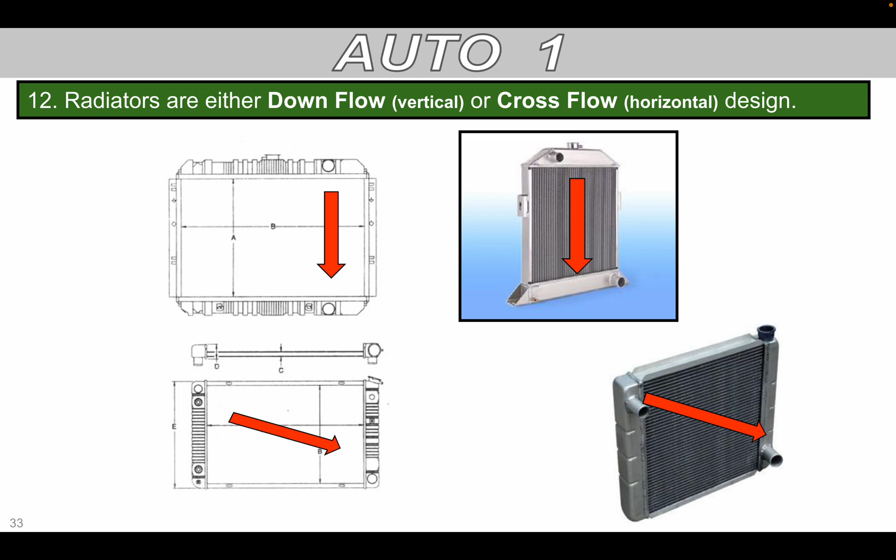Now, with that being said, radiators can be made out of different materials. More common than not, the fins on the radiator are going to be a metal, typically aluminum. Okay, because aluminum is lightweight, it can conduct heat fairly well. Okay, so that way the coolant can take that heat and discharge it into the air through convection, and then cool it down, get it back into the engine.

However, we are starting to see not just completely aluminum radiators. We are seeing parts of plastic added on to the aluminum fins. Plastic is also lightweight. It's very durable. It's resistant to the potential corrosive properties of the coolant. But the radiator cores themselves will still be metal.

Right, Chase? I wrote it down. What? Emerson, you can sit right there. But what about Roto? Yep, that's going to be his new spot. How's that fair? You're correct, it's not fair. He just rubbed it in my face. No, did he? Just one day. Just give me one. No chance. Chase can't handle it. Yes, I can. No, you can't. He wasn't even talking. I have my stuff written down. Yeah. And I'm looking for my notebook. Emerson, please sit in your assigned seat. I'd appreciate it. Thank you.

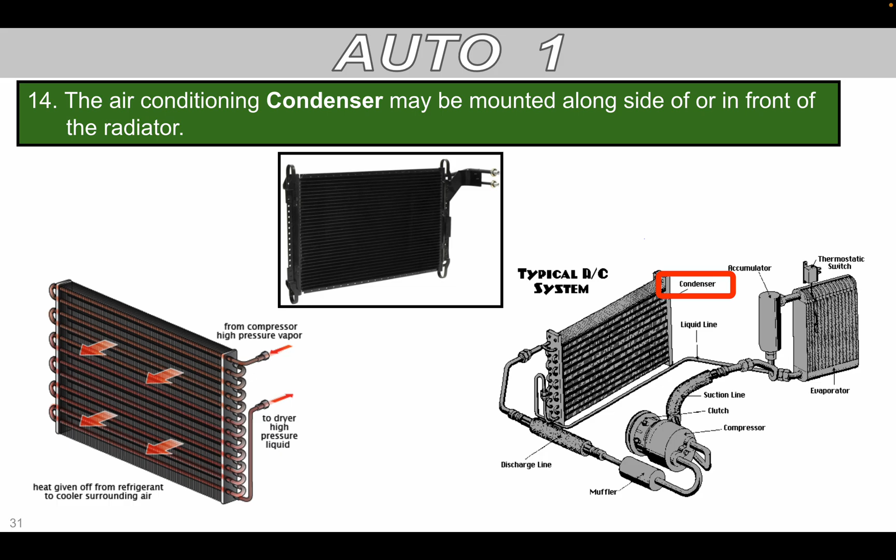But just note, the heater core in our coolant system is there to heat up the inside of our cab, right? Our air conditioning system with the condenser is designed to do the opposite of that, to cool the inside of our cab. All right, it's a very kind of interesting scientific way of how we do things. So, just so you are aware, if you see a mini radiator in front of the actual radiator, that's the AC condenser. Don't get them confused.

All right, next component that we're going to talk about, we got our radiator cap. The radiator cap is a very critical component in the coolant system. It's very technical, even though it might not look like it because it's just a cap, right? You buy a gallon of milk, it's got the little cap you twist on to hold it from spilling, okay? The radiator cap is more than just holding in the coolant, although it does do that.

So typically on the radiator, you're going to have a filler neck more often than not. So if you are ever low on coolant, you can add more coolant directly into the radiator, or more likely the reservoir tank, which we'll talk about here in a little bit. But some older vehicles, you add it right to the radiator. Then you put the cap back on. That cap seals the coolant system. This way we can actually pressurize the coolant system. We'll talk about why we do that here in a little bit.

It also is going to help relieve excess pressure that's being built up in the coolant system. You know how we talked yesterday about the hoses, and the hoses have an internal spring? The reason why we have those springs in that hose is so that way as the coolant system expands, it can stay rigid, or as the coolant system might be cooling off, we don't want the hoses to collapse on itself. So as we pressurize the system, that could expand things. So just kind of keep that in mind.

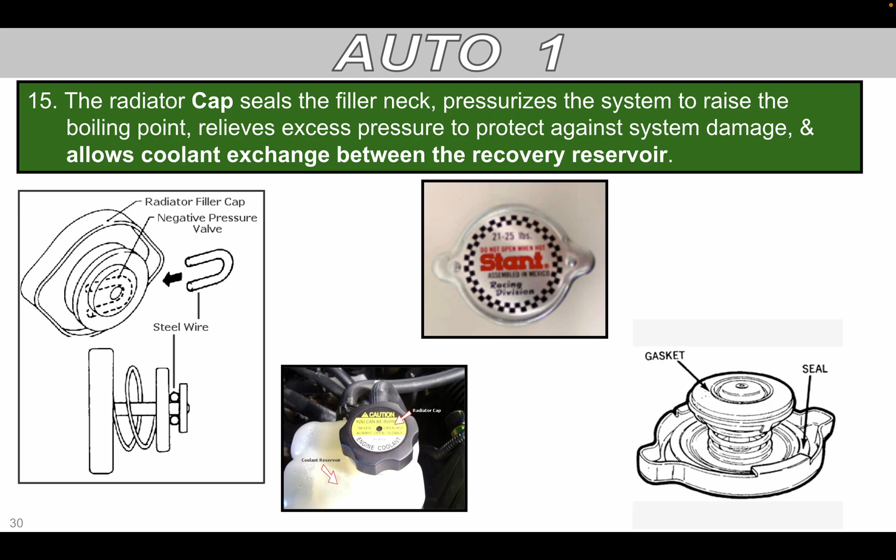And when you go out in the lab next week, for part of the lab, you're going to be pressurizing the coolant system to see if it holds. And then you're also going to be pressure testing this radiator cap to see if it is functioning properly. We'll get more into how you do that, but it's a very simple test, and it's one that you can use in your toolbox to help diagnose if there's something wrong with the system or the cap.

Now, we talked about how a radiator cap is going to help pressurize our coolant system. Why do we want to do that? Well, for every 1 pound of pressure that a radiator cap holds in a system, the coolant boiling point is raised by 3.25 degrees Fahrenheit. I don't get it, Mr. Getsky. Why do we want to raise the boiling point? Well, then it won't boil, right? That's kind of the idea. What is typically 50% of our coolant made out of? Water. Okay, 50% of our coolant is water.

What temperature does water boil at? 212 degrees. Now, what's the operating temperature of my engine? 180 to 210. Boiling is 212. What do you think the odds are that we're going to hit 212 degrees at some point? Pretty high, almost guaranteed. So we're going to pressurize the coolant by a couple pounds of pressure. Now all of a sudden we add 3.25 degrees Fahrenheit per pound to our boiling temperature. So no longer does water boil at 212 degrees. Instead it's boiling at like 216, 220 degrees Fahrenheit. We're raising that threshold because we don't want to boil the water. We want to have the coolant pick up the heat and carry it away.

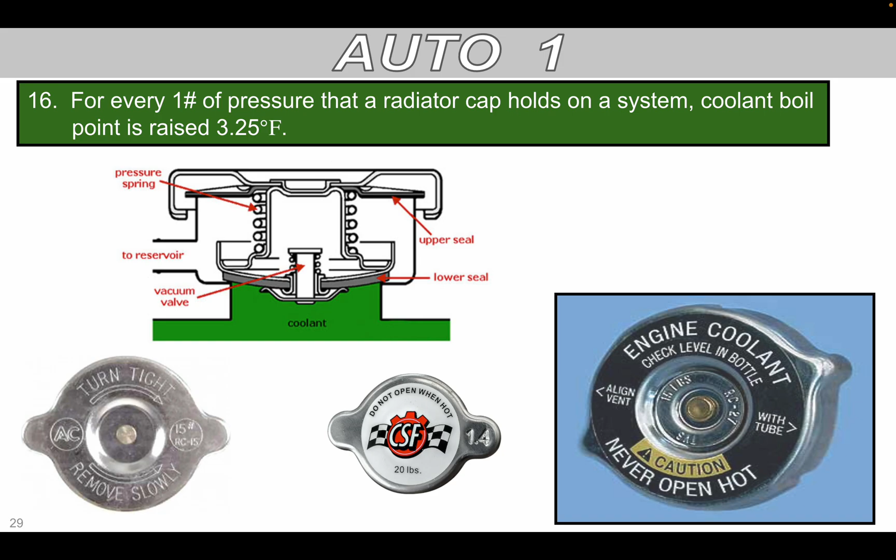So this cap is designed to have a little valve right here that the coolant pushes up on, and there's a limit on how much pressure it can hold. This cap is 1.4, this cap is 15 pounds. Once we start to exceed that limit on the cap, this little bypass valve opens up and allows coolant to flow through the cap into a little tank. Okay? We'll just end with that one. We'll talk about it here in a second.

Now, for every 1 pound of pressure that a radiator cap holds onto a system, the coolant boiling point raises 3.25 degrees Fahrenheit. Now, if I'm looking at a temperature of over 180 degrees Fahrenheit, which is very plausible, because coolant temperature is going to be between 180 and 210, how fast does a third-degree burn happen if it gets on your skin? Instantaneous. You open up that cap and there's boiling hot coolant coming out of that. That's you right there.

So, again, it's a safety thing. Just grab the upper radiator hose, feel it. If it feels like ambient temperature, cool to the touch, you're safe to open it up, no problems. But if it's hot or it's warm, and you can't hold on to that hose for any period of time, wait.

Now, water boils at 212 degrees Fahrenheit. We have a 50-50 mix of coolant or antifreeze and water. We'll talk about what that does to the boiling point. But when I have 15 psi of pressure in my system, the resulting mix is going to boil at 314 degrees Fahrenheit. So we're raising that boiling temperature up very high because we don't want it to boil. But if you open that up, let's pretend that liquid's 300 degrees, it's going to instantaneously boil because it's above that.

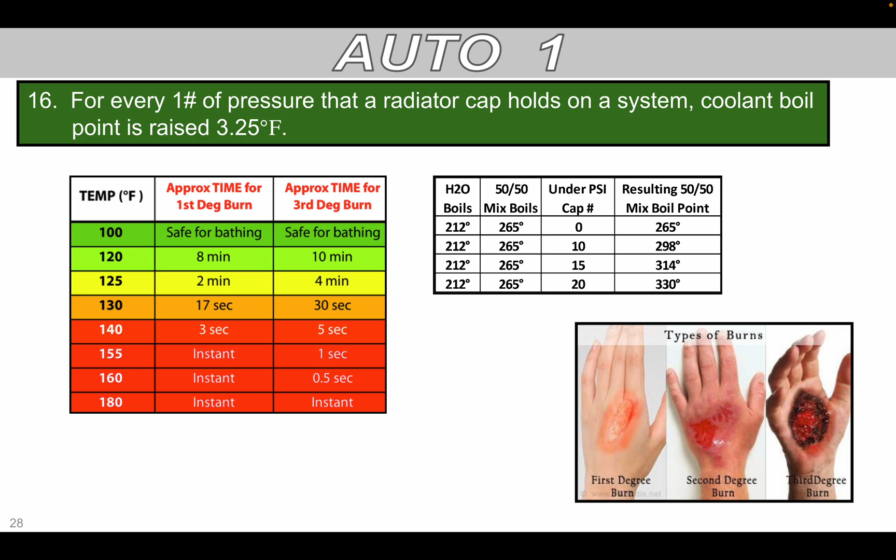We capture it. Once the engine is shut off and that coolant starts to cool down, it's going to collapse on itself and shrink back to its normal size. But because everything's sealed up in the coolant system, it can't really have anything get in, so it can't just collapse. So this vacuum valve does double duty: it will take a hose, basically a straw, and take this extra coolant that we siphoned off, and bring that back in.

Dump it back into our coolant system as it cools down to maintain the correct level. Think of it like those sports drinks where you put a straw in, squeeze the bottle, some liquid comes out, then you let go and it goes back to normal size, sucking in only air. Same concept here, but instead of sucking in air as it expands back to normal size, it'll suck in the extra coolant.

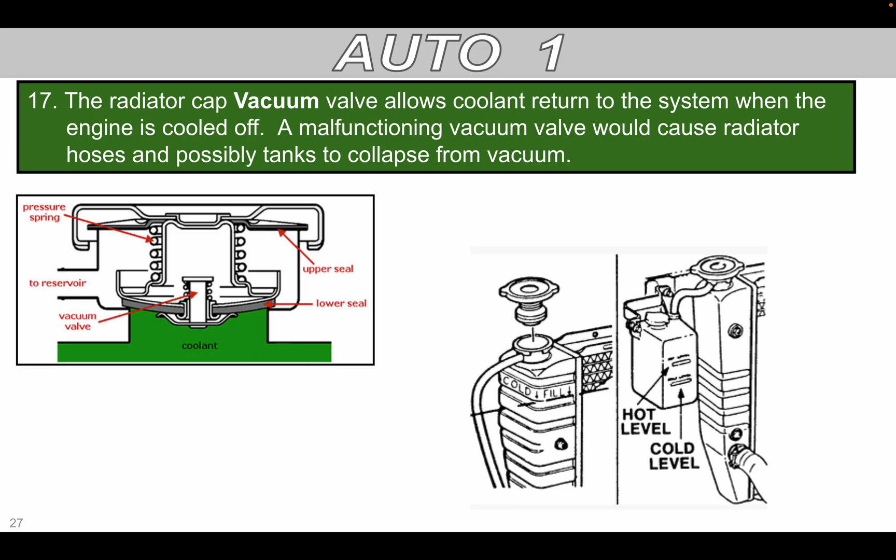Now, back in the day, this is fun, we didn't actually have reservoir tanks. We just had a hose that goes down to the ground. As you're driving, your coolant would expand, the valve would open up, and all that coolant would go down that hose and onto the ground. But then when you cooled the engine down, there was nothing to add back into the system, so your coolant level dropped. So back in the day, before we added a tank, you had to constantly monitor and refill your coolant because it would constantly be dropping. Nowadays we don't have to do that because we have a reservoir tank.

A closed cooling system utilizes the cap and recovery reservoir to maintain proper coolant levels in the engine at all times by burping out hot coolant and later siphoning back in cooled off coolant. These are some good terms we're going to use: burping out hot coolant, siphoning back in cooled off coolant. That's a fun thing to say, cooled off coolant. And that's all because it's a closed system.

So again, you eat a big bowl of chili, right? And all of a sudden your stomach hurts, and you just burp. All that gas and air that was in your stomach needs to leave your system, so you burp it out.

Same idea, okay? Maybe you've done this before too. You eat something, and all of a sudden you get a little throw up in your mouth. You ever do that? He's like, sure. And then all of a sudden you just kind of swallow it quick without actually throwing up. That's essentially the process happening here: the coolant kind of comes up, and once it cools down, the engine swallows it again, but hopefully not any heartburn. By the way, that's a really gross thing to talk about at 8:34 in the morning. But the next time that happens to you after you eat some food, you'll be like, oh, that's just like what the coolant system does in the automobile. You're welcome, by the way. You're welcome. It's kind of fun.

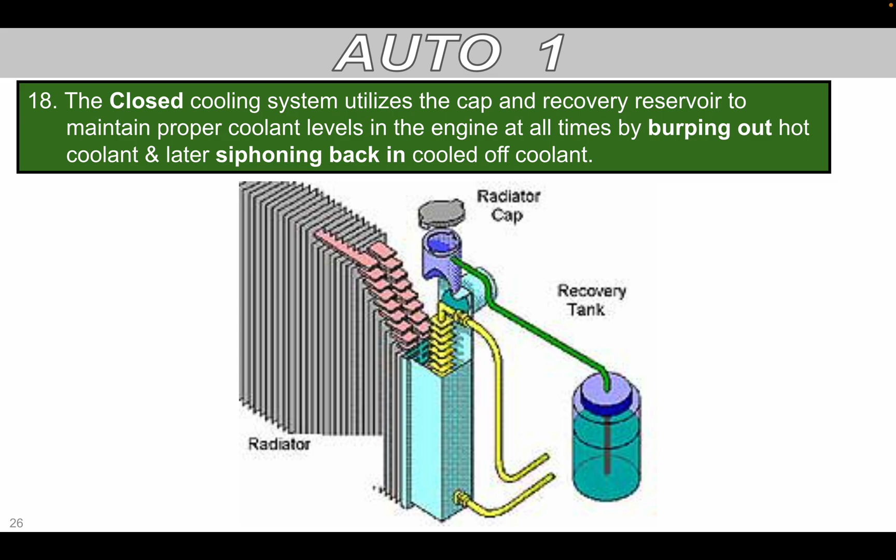All right, moving on. Which of the following is not a radiator cap function?

I like this, I actually got the correct one up on the screen today. Oh, fingers are in the way. There we go, gotcha, got him. Emerson wasn't paying attention, so he doesn't even have his card. Is he sitting in? No, he can sit in the right spot. Well, there's literally like a couple minutes left. It's like less, oh yeah, crazy. It's because you showed up late. You got mine? Yeah. Oh, it's not my fault. Did I get everyone in the back? I think I got everyone in the back row. Yeah. Okay, good job, I win.

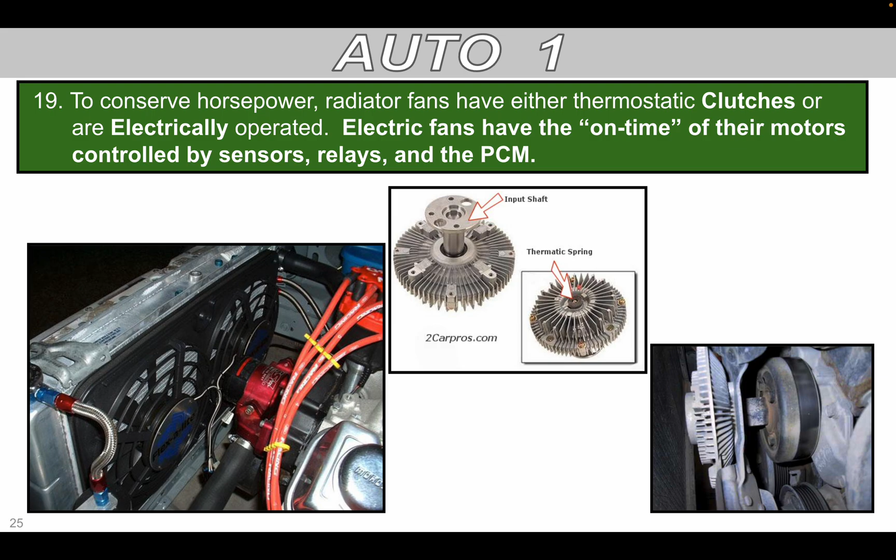Thermostatic clutches, I'm not going to get into the technology behind that, but that is also kind of cool. Before we had computers and sensors, you had two different metals, and as metals heat up, they expand and contract at different rates. So what you'd end up doing is actually put two different metals on top of one another, and as they both heat up at the same time, both of them expand at a different rate, which means this one actually pulls this one down, which is basically like turning on and off a switch. Okay, so as the engine heats up, it heats up that metal, flips that switch, turns on the fan with the crankshaft. Okay, then once things cool down, boom, it popped back into place, shutting off the switch, which then turned the fan off, even though the crankshaft is still spinning. Electrical ones are cooler, it's easier to understand and easier to actually troubleshoot.

Okay, yesterday we talked about a radiator, a radiator being rectangular shape. We talked about how a fan is circular and how the fan, when it's drawing air through the system, is not pulling air through any place that it's not touching. So we're going to get hot spots on our radiator. How do we fix that? Through something called a shroud.

Okay, the radiator shroud acts like a funnel to direct the air through the area where the fan is situated. So all this area here that's not by the fan, we can actually basically put a cover over it and then draw that to the fan. So now all of a sudden air has to go through this area to be pulled through the fan. You can kind of see this here, right? I'll see if I can draw this for you. So even though it's a circular fan, we basically have a box that takes the shape from a circle to a rectangle, which then maximizes the surface area that fan, when it's on, draws the air through. Okay, so again, air is coming in all directions here, but then it's only coming out this section there because of that shroud. Okay, and there are different shapes and stuff for the shrouds.

Here I've got a radiator, I got two radiator fans, but this shroud again allows the air even up here to be drawn down to where the fan is at. That's the whole purpose behind it.

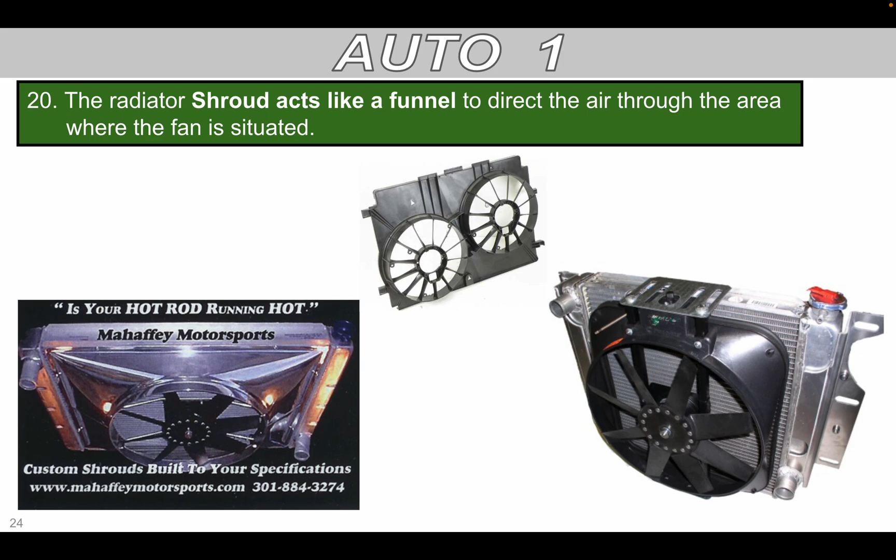How am I doing on time? Not too bad.

The thermostat works with a spring-loaded, wax-filled pellet that senses coolant temperature. Most thermostats are set to open between 180 and 195 degrees Fahrenheit.

When the engine is at ambient air temperature, the thermostat is closed. The reason it's closed is so that when you start your engine, it can heat up as quickly as possible to 180 degrees. It heats up the coolant to 180 degrees.

Then what happens is that 180 degree coolant reaches the wax inside the thermostat. There's literally wax in there, like a candle, and it melts. As that wax melts, the spring pulls down on the thermostat, which opens the plunger and allows coolant to flow out of the engine block toward the radiator. It's a very low-tech system that works very effectively.

You can see here, in this area, the wax sits inside the coolant as the engine heats up. You can see the spring here. The spring pulls down, which opens up this entire top container and again allows coolant to flow out of the engine block to the radiator.

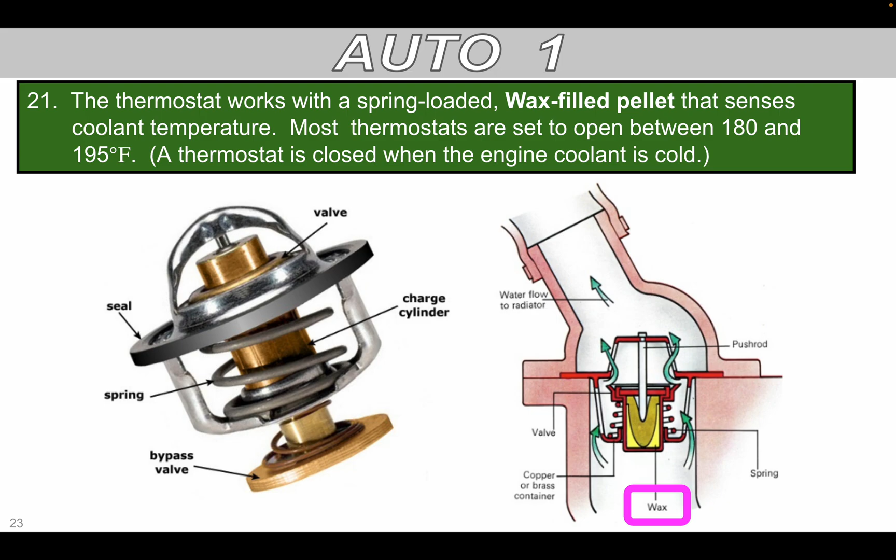We're starting to see a small switch from this type of thermostat to a more computer-controlled thermostat, where now the computer sends a signal through an electric solenoid which opens it up. Now it can vary how much it opens and closes, and when, based on the coolant temperature it's sensing from the engine. It can do much more precise control to keep that engine temperature more consistent than a system like this. But this works well, and I guarantee a lot of modern automobiles still have this type of thermostat in there.

So you can kind of see here a breakdown. This purple part is my engine block. As it heats up, the thermostat is closed, which allows the coolant to circulate in the engine block to heat up. Once it hits 180 degrees, this plunger drops down, which now allows the coolant to make its way to the radiator.

Now, the cool part is, how do I know if my thermostat is working or not? You can literally uninstall it from your car, put it in a pot, and boil water. You will see the thermostat actually open up. If you're boiling water and it doesn't open up, your thermostat's defective—toss it out and put a new one in.

If I had a stove, I have some thermostats upstairs, we could actually do this, but I don't think culinary class would like us coming down there and boiling a bunch of thermostats. That'd be fun. You should ask Debbie, that would be cool. Yeah, no kidding, right? We got 4 minutes.

Okay, this is going to be our last slide for today. Again, just like an oil bypass valve, a thermostat has a bypass valve to maintain circulation of the coolant through the block, at the heads, and the heater core when the engine is not yet warm.